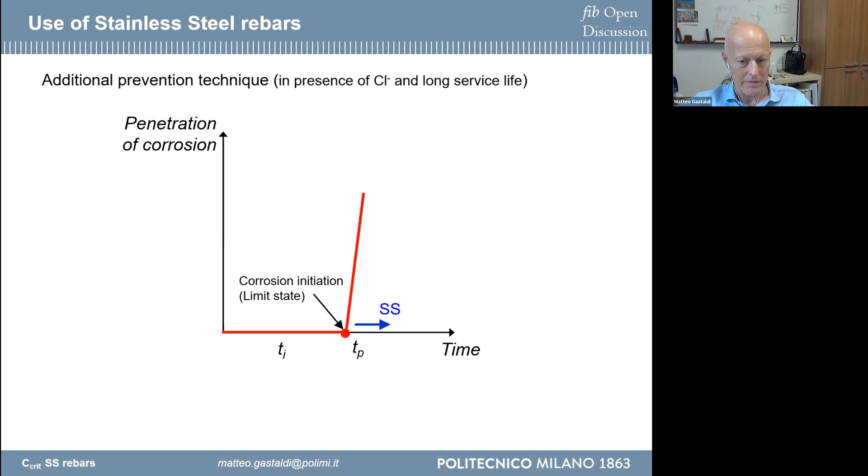For this reason you have to consider other solutions, and the use of stainless steel rebar can give you the answer. Just to give an idea about why we can consider using stainless steel rebar: stainless steel rebar has a higher corrosion resistance with respect to normal carbon steel, so with stainless steel you can consider reaching a higher service life and having corrosion limited to a time that is higher than the normal time you consider for carbon steel.

The problem is that there is not only one stainless steel proposed in the market for use in concrete, because there are several kinds of stainless steel. This is also reported in the first presentation, and I thank the professor for this introduction that helped me say that there are several stainless steels, and this is the problem. It's not like for carbon steel, which is more or less one type. Well, it's not entirely true for carbon steel either, but generally it's more or less the same. For stainless steel, you can have different kinds.

I don't want to go into detail related to this, but the traditional stainless steel used in construction, in reinforced concrete structures, is generally of two types: austenitic stainless steel and duplex stainless steel. For austenitic stainless steel, related to the structure of the steel, I don't want to go into detail - the most used is 304L, the name used in the American standard.

This is a stainless steel with a very high amount of chromium, around 18%, and an amount of nickel around 10%. Another austenitic stainless steel commonly used is 316L, which also has an amount of molybdenum around 2-3%, different from this kind of austenitic stainless steel. The presence of these alloy elements naturally affects corrosion resistance. There is another important question related to the amount of carbon, which is very, very low - this is normal for weldable rebar.

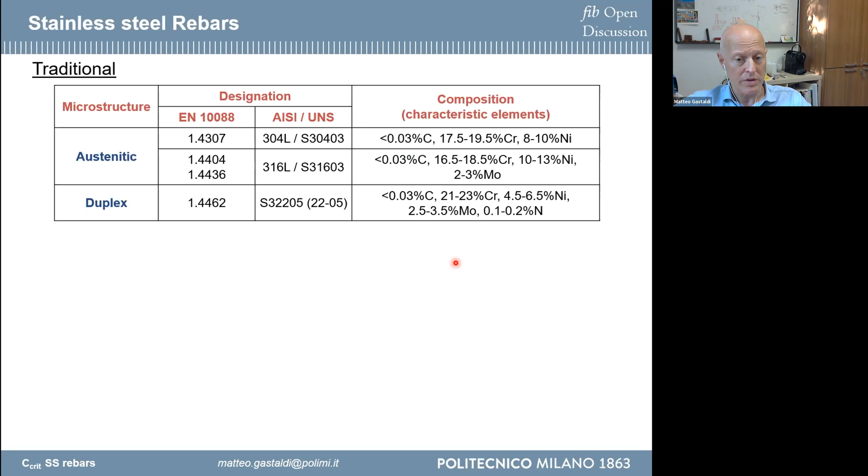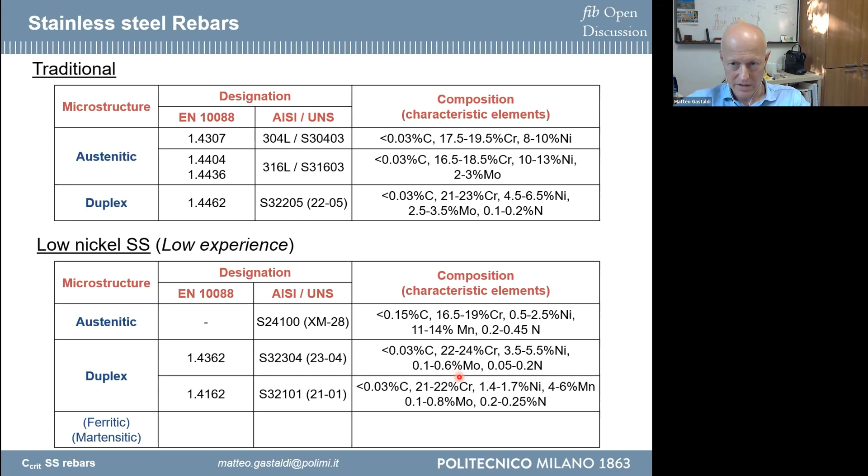For reasons related to cost, nowadays other kinds of steel are also proposed in the market: austenitic with low nickel, and duplex with low nickel. These kinds of stainless steel contain different alloy elements than the previous ones, and in particular you have manganese inside some of these steels, which affects the corrosion behavior - I'll try to go into detail related to this. These different stainless steels have different corrosion behavior, and this is important to consider. When we want to design using stainless steel, it's important to consider that we have an effect related to the difference in corrosion behavior, which is related to the chemical composition of the steel.

For this reason, when we design a reinforced concrete structure, we have a target related to the durability we want to guarantee. We need to select the correct stainless steel to guarantee the service life. This selection needs to be maintenance-free, because stainless steel has a higher cost than carbon steel. If we spend money to prevent corrosion, it's important that it guarantees the service life without corrosion problems. This is why you have to make a correct selection to avoid corrosion for the target service life.

If you want to make a correct selection, it's fundamental to evaluate the critical chloride content for the different kinds of rebar.

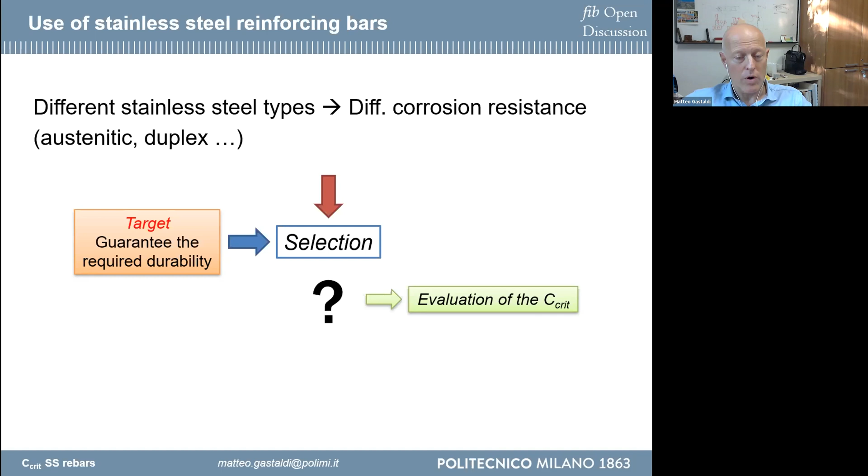Generally, for applications that are not concrete, there is a number used to evaluate the corrosion resistance of stainless steel rebar. This number is called the PREN number, the pitting resistance equivalent number. It's normally used for applications where stainless steel is in contact with a solution, generally neutral or acid solution, and it works very well for this kind of application.

This number is related to the amount of the main alloy elements that affect resistance to corrosion in this environment: the percentage of chromium, and the percentage of molybdenum, which has a higher value with respect to chromium because it's multiplied by 3.3. And nitrogen has a very strong effect, but the amount of nitrogen normally present in steel is very low. Still, its effect is multiplied by 16 or 30 - 16 for austenitic stainless steel, 30 for duplex stainless steel. This is what is reported in literature.

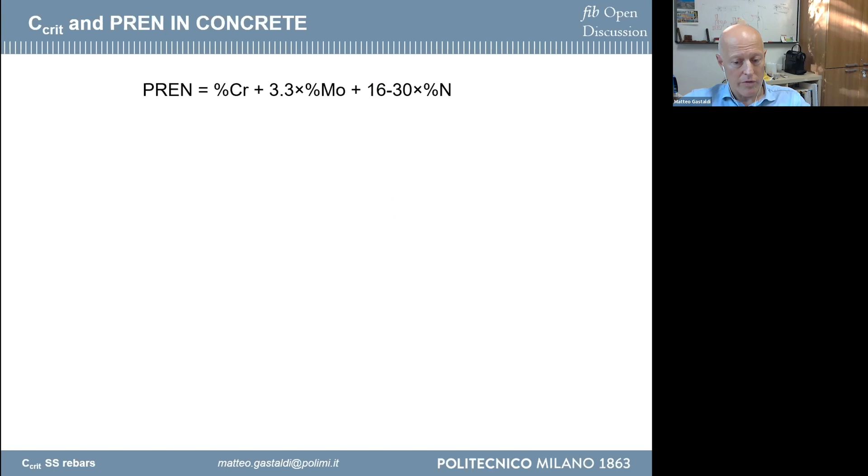The problem is that when we move from neutral or acid solution to an alkaline solution, like what is normally present in concrete, PREN is not effective. So we cannot use PREN to get an idea about resistance to corrosion related to chloride-induced corrosion initiation if you're in an alkaline environment, because the effect, for example, of molybdenum is lower than in a neutral solution. You can consider using this number to select stainless steel if you are in carbonated concrete, where the pH is not 13 but below 9.

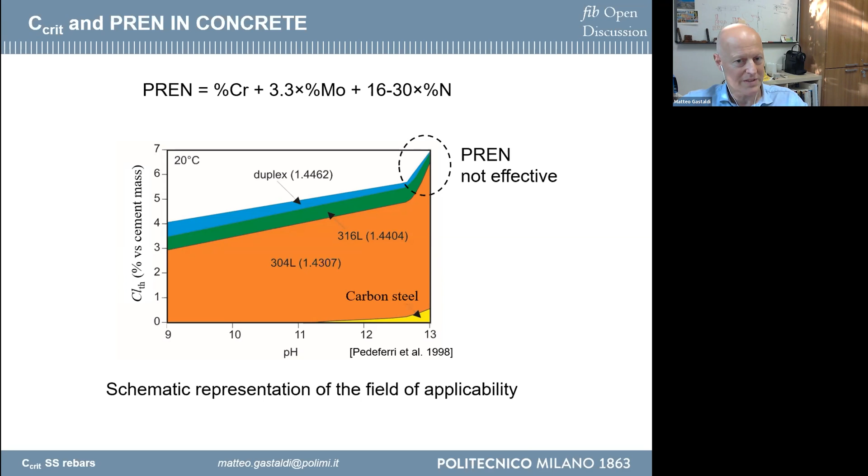For concrete that is alkaline, the normal condition in a structure exposed, for example, to seawater, the high humidity present in this area doesn't help achieve fast carbonation of concrete. Also, generally concrete with a low water-cement ratio is used, so you have low penetration of carbonation. It's not as easy to have carbonation as at the sea surface, so it's easier to have alkaline conditions, and in this condition it's not possible to use the PREN number.

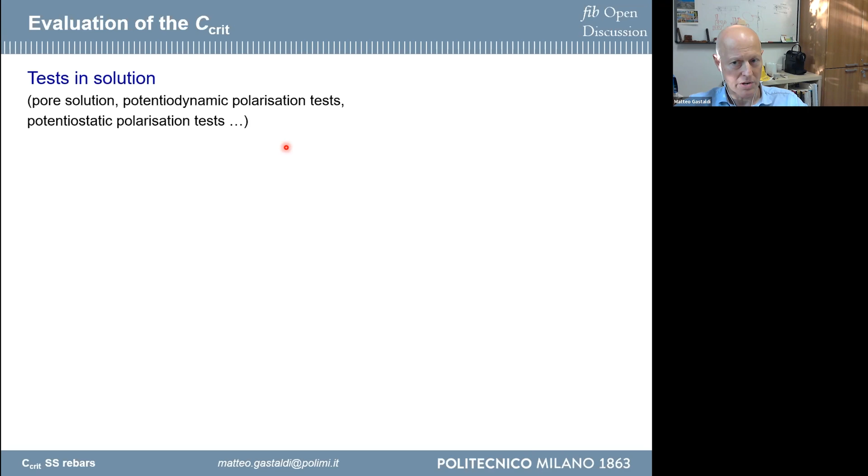So the problem is how to evaluate the critical chloride threshold for stainless steel rebar. In the past, a testing solution was proposed, also for carbon steel, not only stainless steel. This testing solution generally uses an alkaline solution that simulates pore solution, and different electrochemical tests - potentiodynamic, potentiostatic - were used to evaluate corrosion resistance and estimate the chloride threshold for stainless steel rebar in this condition.

This kind of test has the advantage of being rapid, giving results in a few days. The problem is that the chloride threshold found in this condition is not the same as the chloride threshold found in concrete, because the chloride concentration in solution cannot be directly converted to the chloride content in concrete. You also don't have the effect related to the interface between concrete and steel, which is very important, as we considered before in the previous presentation.

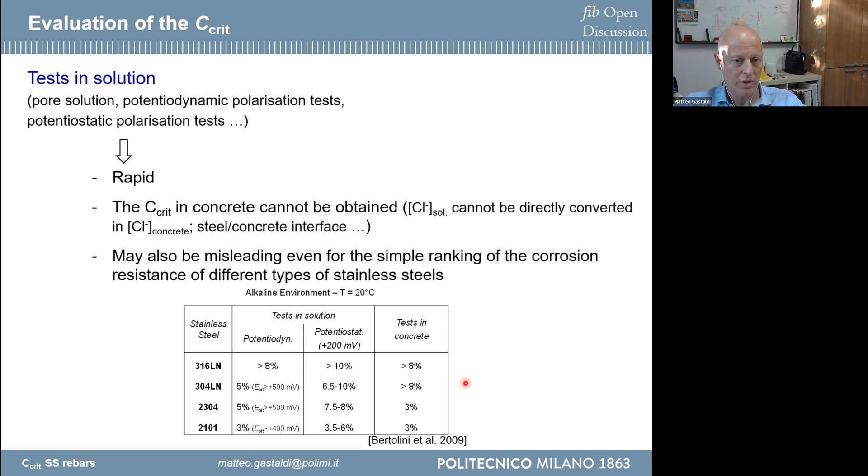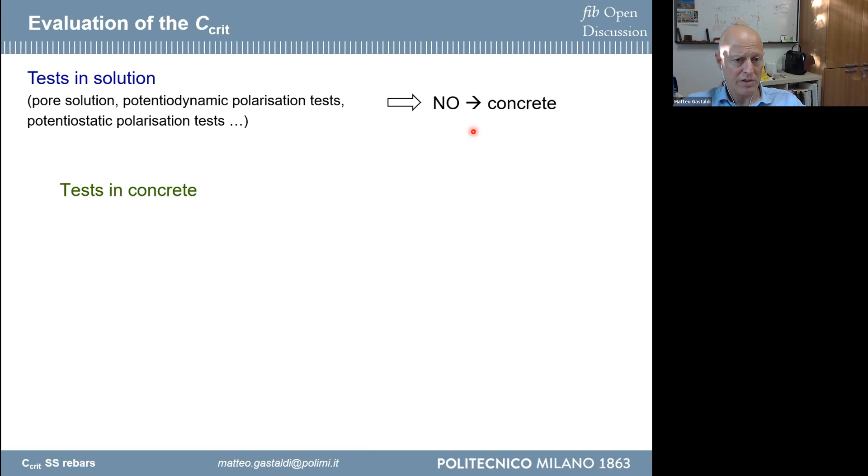So this is something that you have to take into account when you consider testing in solution. It's not possible to have an idea about the critical chloride threshold in solution, and so we have to move to concrete. What's the problem?

The problem is that you need a long time to have initiation of corrosion in concrete when you have stainless steel, because stainless steel has high corrosion resistance. For this reason, you need a very long time to reach the amount of chloride that is enough to create corrosion initiation on this steel.

So if you make ponding tests, as we observed in the previous presentation, it's not so easy to obtain the amount of chloride at the steel surface even after 2 years, 3 years of testing, in order to have corrosion initiation. Just to give you an idea about the corrosion resistance of different stainless steel rebar, I want to show you this diagram that gives an idea about a review related to results obtained in the literature related to tests on different types of stainless steel rebar.

Here you have black steel and the reported range that is normally considered, as we also discussed before in the previous presentation, around 0.4–1% of chloride at the steel surface. This is the range of corrosion resistance and the related chloride threshold for black steel in concrete mortar test specimens.

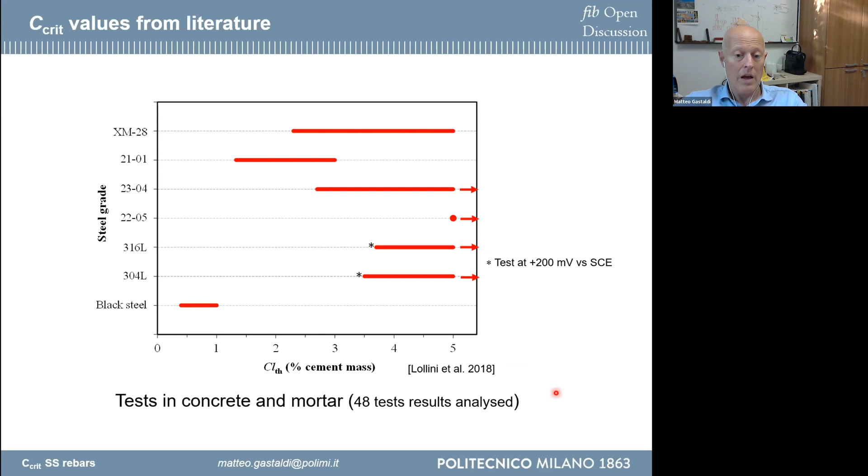Moreover, it's important to consider that the critical chloride threshold is affected by a lot of parameters. It's not only the type of stainless steel, but fundamentally the corrosion potential, as Professor Andrade told you before, which is related to the exposure condition, because corrosion potential is affected by the amount of oxygen, which is related to the humidity content in concrete. Humidity content is generally the main parameter affecting the presence of oxygen, along with the structure of concrete, but mainly humidity content affects the presence of oxygen at the steel surface.

So if you are deep in the sea, the problem is related to the diffusion of oxygen, and the amount of oxygen that reaches the steel surface is very low, and this creates an incredible change in the corrosion condition that you have. This is only to give an example.

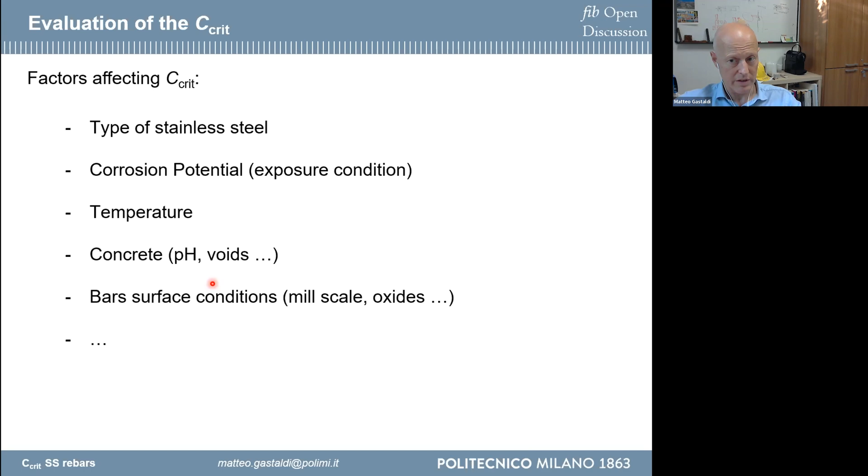This can greatly affect the corrosion condition on stainless steel and can reduce the chloride threshold considerably. Due to the time needed to have corrosion initiation on stainless steel rebar, a practical way to get an idea about the corrosion resistance and chloride threshold is to use accelerated tests.

This is not the real condition, it's an accelerated test, but accelerated tests are normally used also to obtain other parameters. For example, the diffusion of chloride in concrete used in models is sometimes obtained using accelerated tests, so this approach is common for obtaining various parameters.

In an accelerated test, you can add chloride directly during mixing, which helps you have a controlled amount of chloride at the steel surface in a very rapid way, and make an anodic polarization, using the circulation of current to increase the potential.

In this way you can have a rapid, fast idea related to the initiation of corrosion of reinforcement, because increasing the potential makes it easier for corrosion initiation to occur.

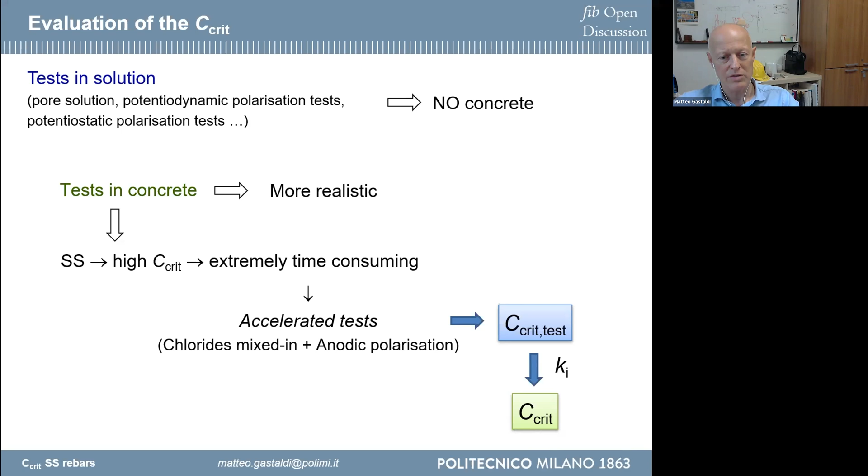To give you an idea about possible accelerated tests, we can fix the potential value and change the chloride content inside the concrete specimen. As Professor Andrade mentioned before, it's very important to have a number of samples that give us a statistical evaluation.

You repeat the test at a specific potential with different amounts of chloride, in order to have, for example, the first initiation of corrosion in one sample out of ten at chloride content Cl2, then increasing the chloride content and increasing the number of samples affected by corrosion, until the amount of chloride that gives corrosion in all the samples under study.

In this way, you can obtain a distribution of the chloride threshold. If this test is repeated for different potentials, you can obtain the diagram also shown by Professor Andrade, the Pedeferri diagram, which gives the relation between potential and chloride content.

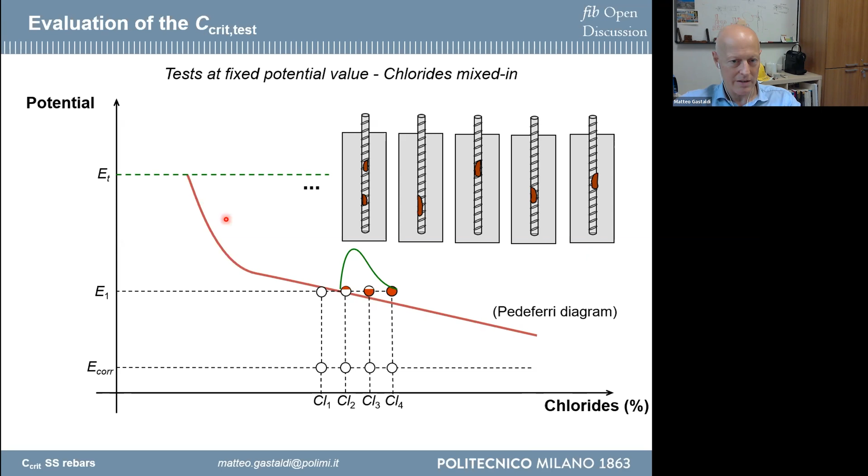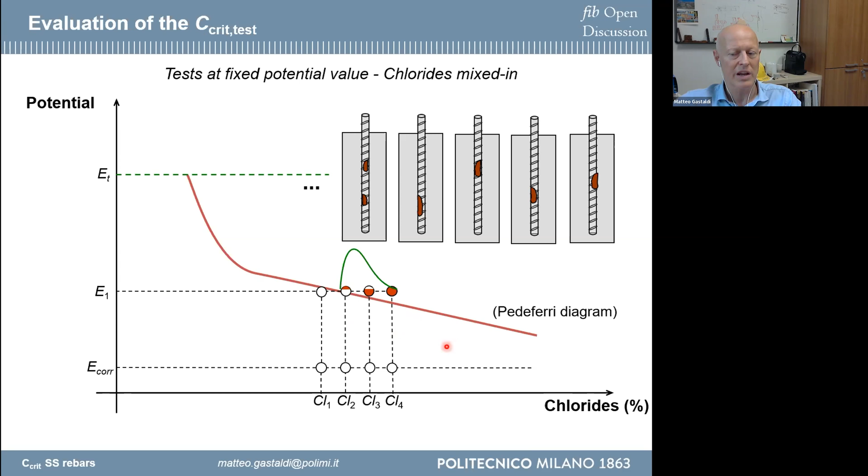You can draw the Pedeferri diagram considering the condition you take as the limit state for the critical chloride threshold, for example the lower value equal to 10% of samples affected by corrosion. This helps you draw the diagram and obtain the chloride threshold for different potentials, since you can use the potential present in the real structure to get an idea of the critical chloride threshold in that condition.

Another possible solution is to fix the amount of chloride and increase the potential instead, and you can obtain the same result.

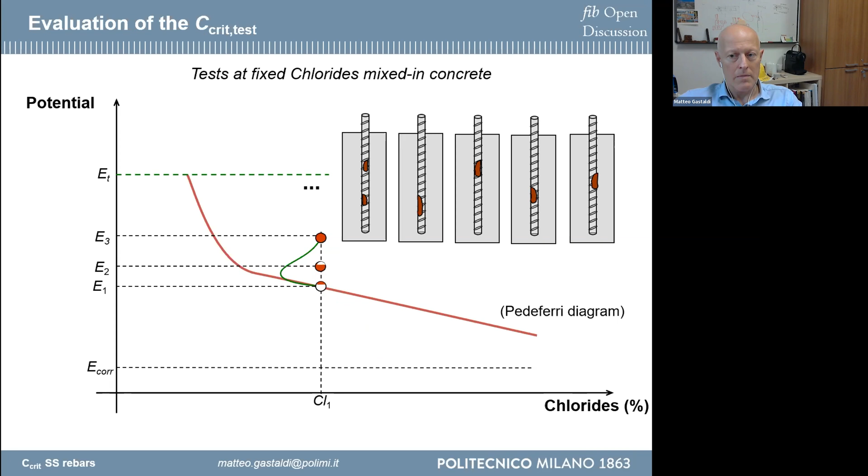This is an example of results related to laboratory tests for this kind of procedure. This is a test with different samples having a fixed amount of chloride, with the potential increased over time in steps of 1 hour. The increase of potential is 50 millivolts per step, so each hour the potential is increased by 50 millivolts.

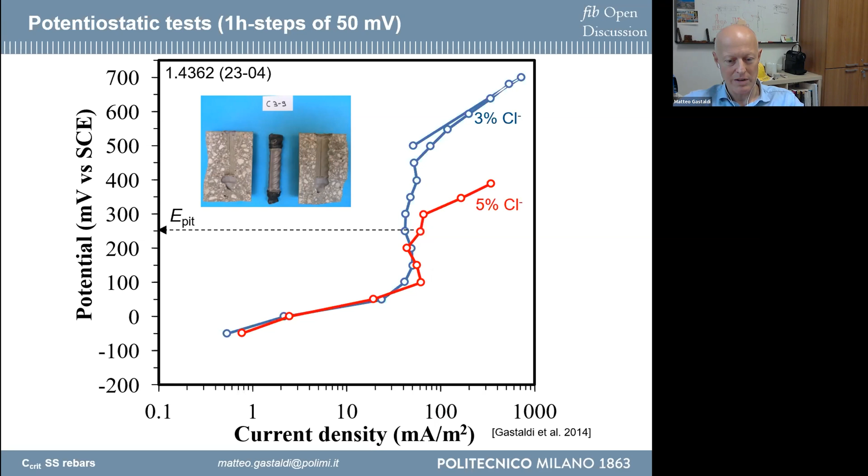So if you repeat this test for a lot of chloride contents, changing the potential and so on, you can obtain the data to draw the threshold diagram for this condition, in tests with a change of potential of 50 millivolts in steps of 1 hour.

If you change the test parameters, for example making a step of 12 hours, you obtain another diagram that gives initiation of corrosion at a lower potential. This is normal, because 1 hour is probably too fast, too rapid a test. If you make a test that is not so rapid, you obtain a pitting potential that is lower and closer to the real condition.

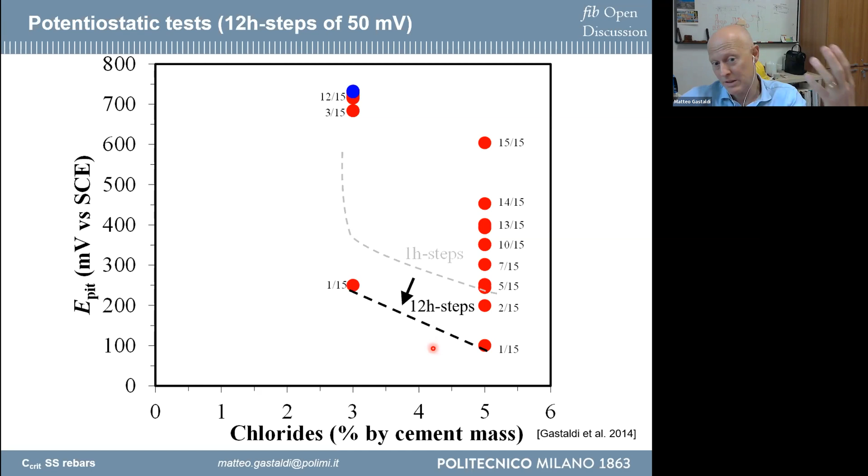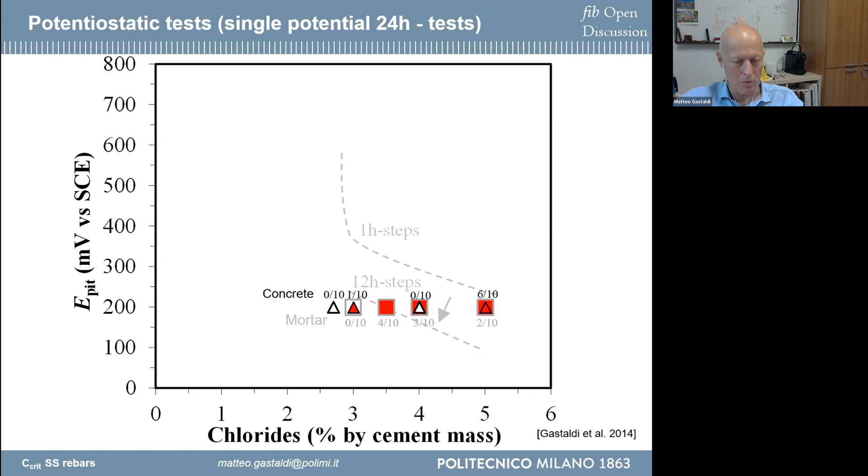Then when you move from this condition, where the potential changes over time, to a test where you fix the potential, you can obtain something that is probably closer to what is present in the real condition.

So you can obtain the statistical distribution of the chloride threshold, with no corrosion initially and increasing corrosion with increasing amount of chloride. If you repeat this static test at different potentials for 24 hours, you obtain a diagram that is below the diagram I showed you before.

This can give you a lower value of potential at which corrosion initiates. This is probably closer to what happens in tests with a very long exposure time.

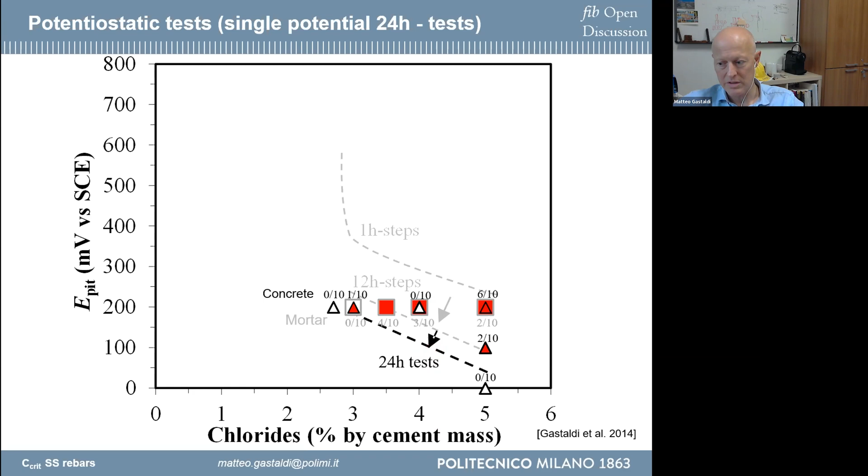So the problem is how to evaluate the potential that we can consider in order to make this test.

We can analyze data related to potential on real structures. You can observe that in a real structure, or also in laboratory tests, you can measure different potentials in different conditions: atmospheric area, tidal zone, splash zone, and submerged area. You can have different potentials, and if you move to the worst condition, the one with the higher amount of oxygen, you are close to 200 millivolts.

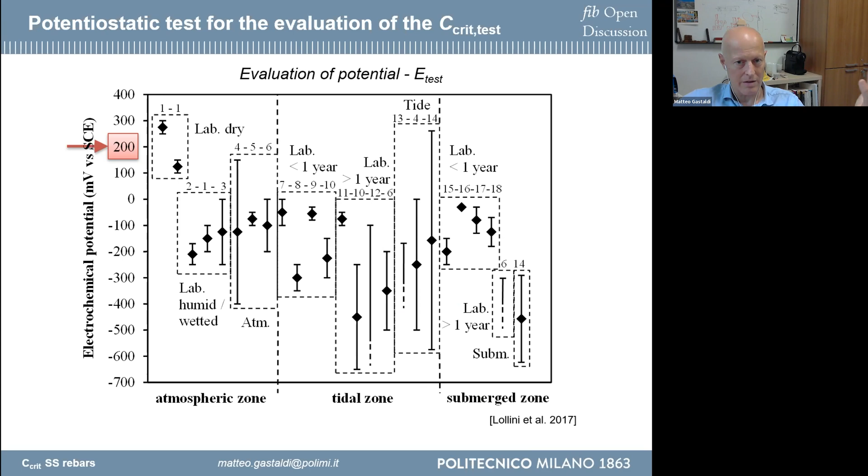So this is the potential that can be considered to get an idea of the worst condition in a real structure, related to areas with a high amount of oxygen.

Then for the test, first you have to decide what concrete we want to use. Concrete or mortar, it's fundamental to fix the mix design. You can consider using a standard mortar, for example. You mix in chloride, and here there is a problem related to the type of chloride you want to use, sodium chloride or calcium chloride, because they have different effects. With sodium chloride, generally you have a higher chloride threshold; with calcium chloride, you have a lower chloride threshold.

This is what happens. Stainless steel rebar has to be used in the condition related to production, only degreased, so you can evaluate the real chloride threshold considering the real surface condition of the rebar. You have to repeat the test for a minimum of 10 specimens, meaning 10 bars. It's also very important to mask the ends of the bar to avoid problems related to crevice corrosion, which is a common problem in this kind of test.

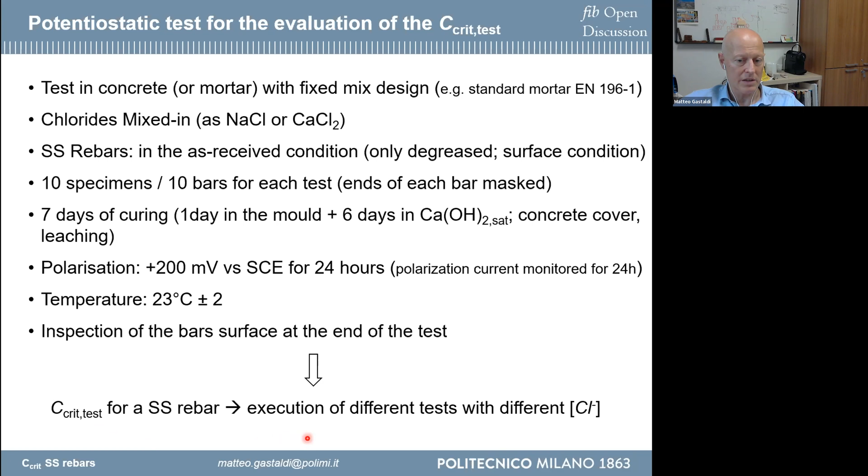You have to consider that if you want to have the critical chloride threshold, you have to make the test for different amounts of chloride.

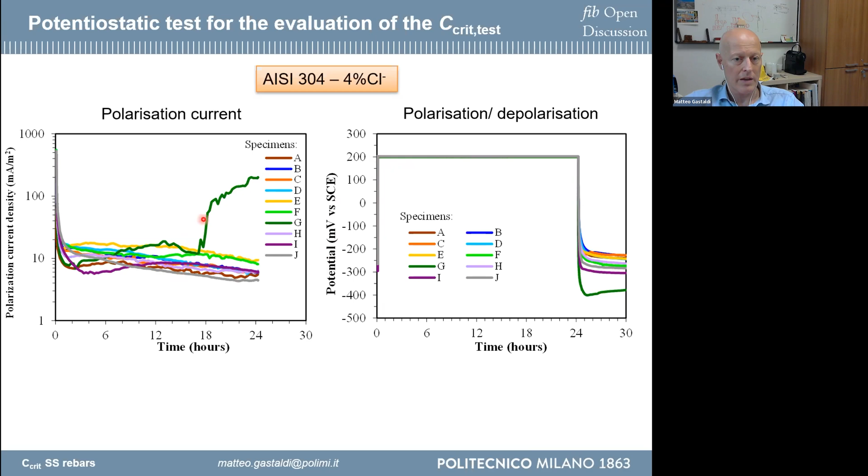So if you repeat this test for different stainless steel rebar, for different amounts of chloride in this specific condition, you can obtain the distribution of the chloride threshold. Here, for example, I reported some results for two different stainless steel rebars: austenitic stainless steel with manganese, and 2304, another stainless steel that I showed you before.

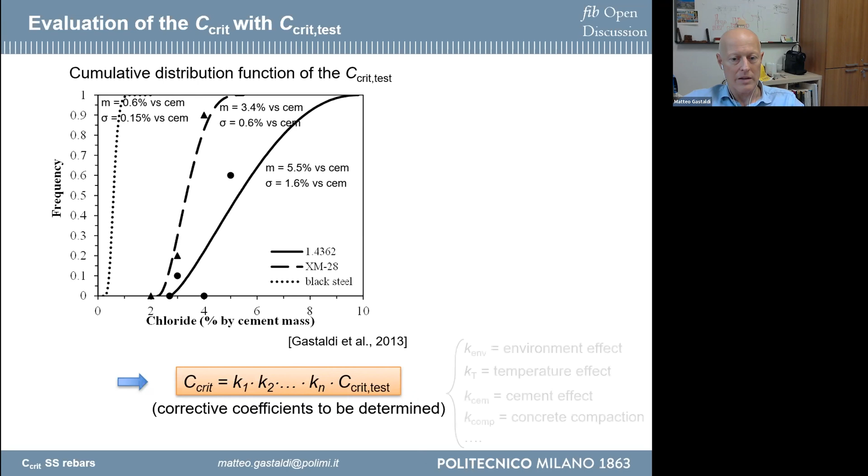Naturally, if you want to have the result related to the real critical chloride threshold, you need information about the coefficient that helps you obtain this parameter, considering the result that you obtain in the critical chloride threshold related to the test. So you need information about the effect related to the environment, the temperature, the cement type, the compaction, and so on.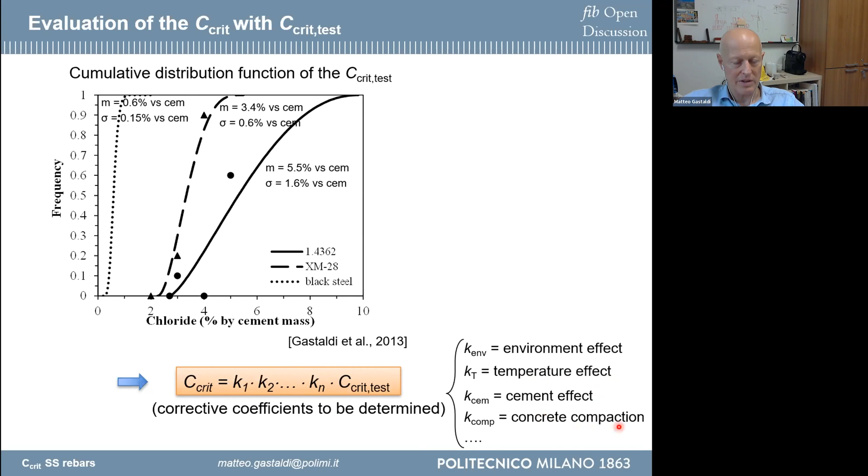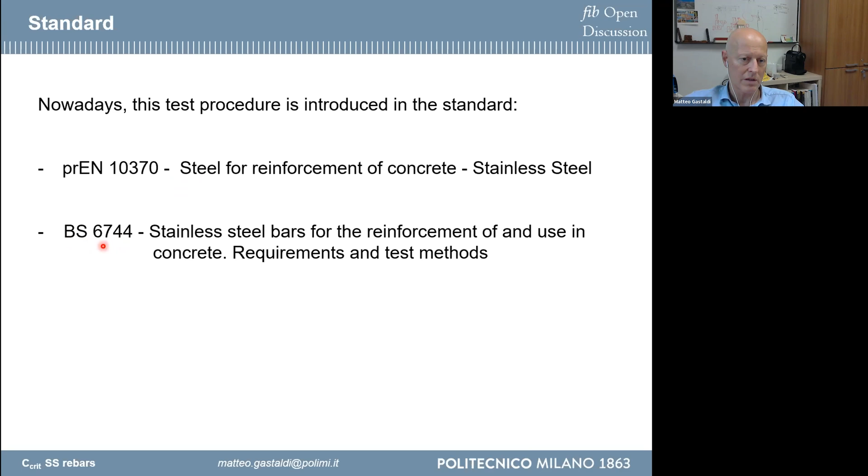Just to give you an idea, this kind of test nowadays is present in two standards. There is a prEN, which is the European pre-standard, that contains this kind of test, and it's also present in a British standard. Thank you for your attention.